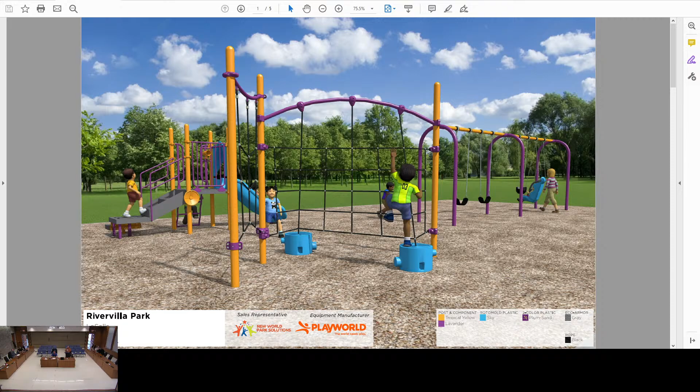We got the Rivervilla Park, which is a smaller neighborhood park. It was a smaller budget. So with smaller budgets like this, the one thing you want to do is go after the main thing which children play on the most, which is obviously swings. So we have a 2-bay swing set there. In the swing set, you'll have 2 belt seats, a toddler seat, and then an accessible swing seat, so everybody can play on the swings. That's the most important part of a playground for children. They seem to really go to that, and that was part of the tender as well.

They wanted 2 bays. On top of that, they specified they wanted a small structure for the little ones with a slide, and then climbing apparatus with ropes. Because of the budget, we couldn't go large, but we went with some of our most popular items. On the small playground, there is a transfer station that gets you up to the 2nd deck. On the deck, we put a telescope. It's not a real telescope, but you can still see through it and look around, and it's an accessible one, so it's been lowered a little bit. There's a slide and a climber, and then at ground level, there's an accessible steering wheel.

Then when you go to the senior area, we have 2 different types of rope climbers, and what we did with those is put seats at the bases, so children can sit there. If they can't climb, at least they can be around the area and be with other ones. The ropes, I brought all the way down to the bottom, so some children that can't reach up or get high can still play with the bottom ropes, and children that have a little bit more flexibility and strength can climb up to the higher levels.

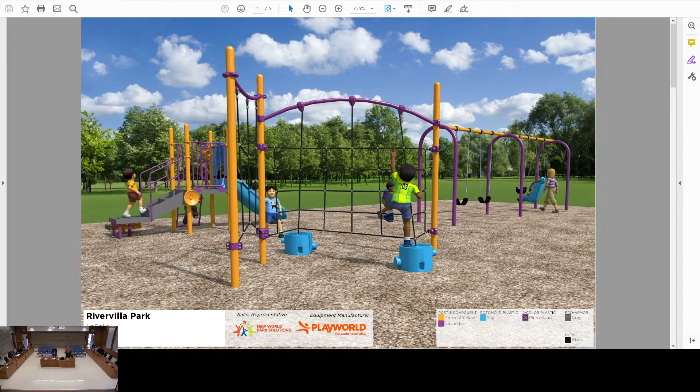I just wanted to add one thing I should have said at the beginning. All the playgrounds we're installing this year have an engineered wood fiber base, so none are being built with the rubber play base. From an accessibility perspective, a lot of times we have questions about whether engineered wood fiber is accessible, and it is. That's really important to remember. A big reason we've gone with that on all these parks is the cost.

The cost of the rubber base is significantly more. And we've found with maintenance and replacement over the years that our rubber play bases, while really nice especially at the beginning, do often require repairs. The lifespan on them is limited, and it sometimes doesn't match up with when the playground is going to be replaced. So especially on our smaller parks and playgrounds, the engineered wood fiber is the preferred method for our operations.

Thank you. I will open it up for questions or comments from our committee. Mr. Burns?

I guess to administration, it's nice to have the playground equipment, but are we going to have any park benches? Because there's more than one child, could be young, and what does the mother do to sit and read a book or something? I don't know if that's in our budget or what's planned besides that.

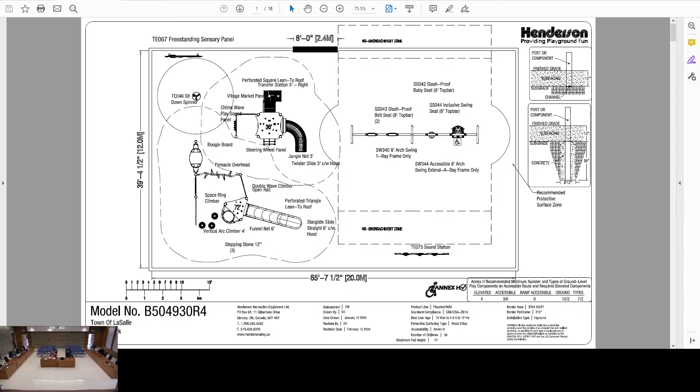So with that, they would take a project and say you have so many elevated components, therefore you need so many on what's considered an accessible route. Someone with limited mobility, not necessarily a wheelchair, can they get to certain things? There's a formula for how many ground level play items and how many types of ground level play, so you don't just have a wall of steering wheel panels or things like that. So with this project, we have...

We have the senior structure, the swing set, spinner, and a couple of panel sections. In this one, the junior structure has a transfer station, which allows a child in a mobility device, assuming they can get out of that device, the opportunity to basically move out of their chair onto the step, and then maneuver without raising their feet any greater than a 6-inch rise.

So with that, it has a transfer station going to a 3-foot deck with an elbow slide, a jungle net climber, steering wheel panel, and then at ground level play, we have a village market panel, which is a play piece, social play piece, and a musical chime wave.

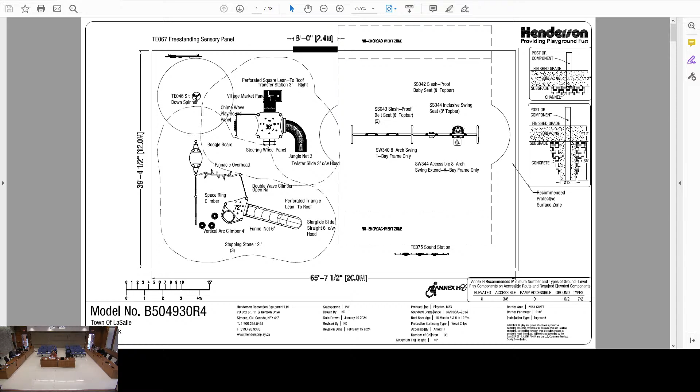If you can switch over to the next one, please. Thank you. So those are the two traditional type structures, the ones that look like what you're used to seeing in a typical play space. So we do have a variety of climbers, a variety of ground level play, and slides with good access there. The next one, please.

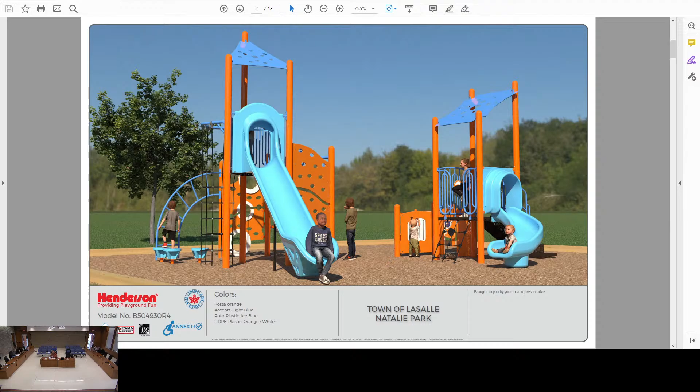Just another angle. If you look in the lower left corner, that's a sensory play panel. It's a very large panel with a variety of play pieces for someone who is young to access, with a bunch of different devices on it, gears, little finger maze items they can use for other sensories. And next to that is a spinner.

If you can go back to the other slide, please. There, next to it looks like a little keyhole. That is actually a spinning device, so a child can sit on it or stand on it, and it rotates. It's purposely on a bit of an angle so that your body weight allows it to spin versus being straight up, where it's pretty difficult to get that momentum.

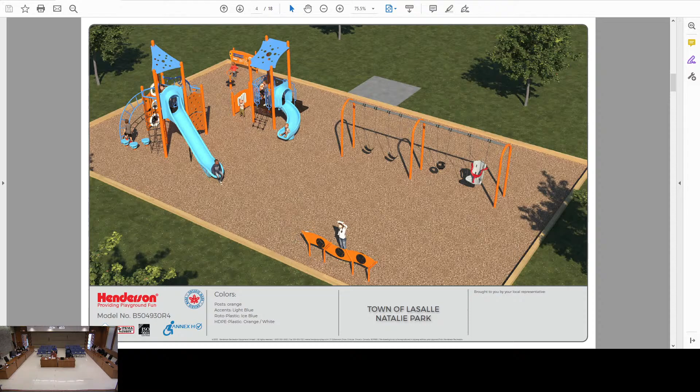Okay, next one, please. Here too, you have the swing set with the 2 belts, a baby chair, and an inclusive chair for those that require it. That is positioned at the end there. If you notice in that render, there's a bit of a cement piece up at the top. That would be the access cut out of the wood border, allowing wheelchairs or mobility devices into the play space and onto the engineered wood fiber mulch surfacing.

And the other item at the bottom of the page, you can see the rendering of a young girl there. It's orange with the 3 black circles. The face on that is actually a series of musical devices that operate by use of an electronic dynamo. So what you do is you spin the dynamo, and it gives it energy so that when the child touches it, it will create a musical sound.

You'll also notice that it's a bit elevated. The idea for that is so that if I'm in a wheelchair, it's possible that I can get my knees under it, so I'm that much closer to it versus getting access to it by being sideways and trying to use it. I can actually use it properly.

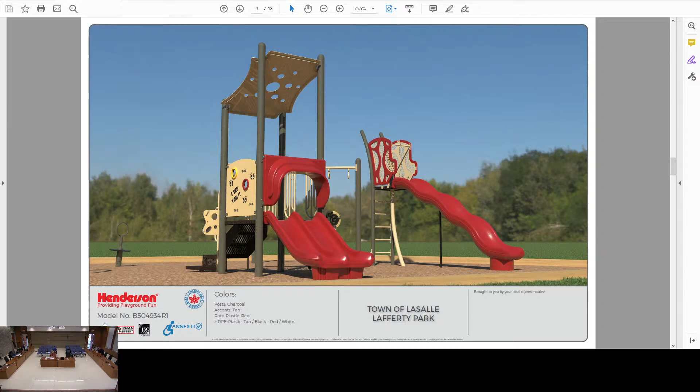Just a different angle. The senior area has a 6-foot slide, ladder access, and a trapeze arc for upper body.

I believe that's the last of the Lafferty angles. If you want to go to the next one, please.

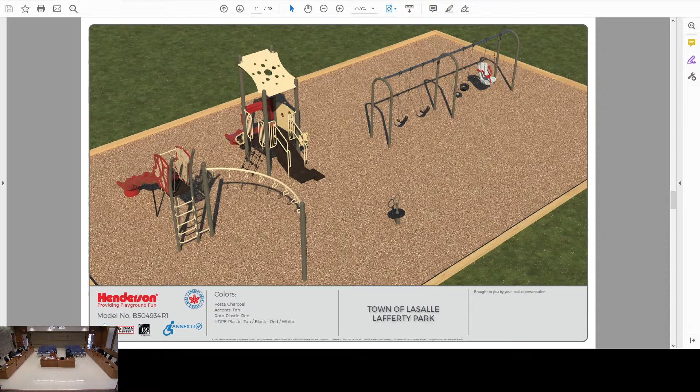So there we go, everything within there. There's a secondary access up to the 3-foot slide with that jungle net climber, so there's a primary and a secondary access for the younger children.

And next slide — so that was for Lafferty. Was there any questions on that one? Any comments or questions from the committee?

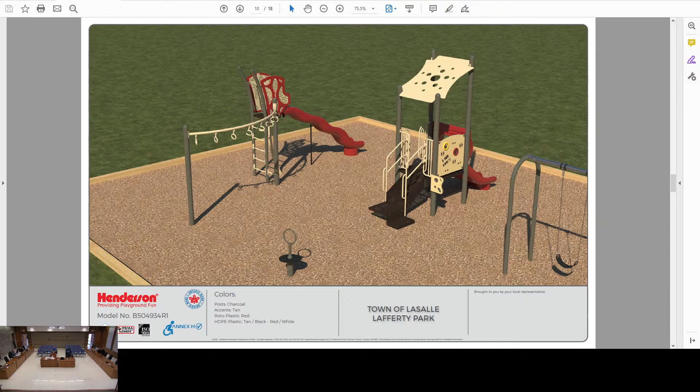I don't see an access for a wheelchair pad like you had in the last one. Can you go back, please? Or is it on this slide? On the colored pictures, I don't see it. Maybe I missed it — go back one more, and one more.

It didn't come out in the renderings just because of the angle, but it is there — that blacked out area near the scale. That's the area notched out of the wood border, and when the installers are there, they'll work with Mr. Bryden's crew to fine tune the exact placement to your pathway.

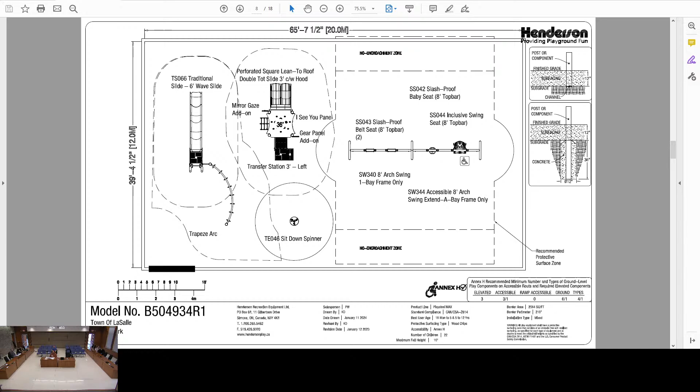Any other comments or questions? Okay, Mr. Wendell, you can go on to the next. If you can forward to the next black and white. There we go, back one. There we go. So this one here is Meo Park.

And here too, same as what I said previously regarding the CSA and Annex H for accessibility - trying to get you as much play value within the space as possible that is going to actually be used, like things that are proven winners.

Here you can see that blacked out area on the site plan just off from the swing - that's the access. That proved to be the most logical place to put the access based on the placement of the path within the park and logical access into the play space.

If you notice those dotted lines around the equipment, that's the surfacing zone - the play zone required under the Canadian Standards Association. I don't like putting access points where you're walked right into that. It's just good practice not to have a child walking into the no encroachment zone if we don't need to, for the swing - because a child using a swing has no way of stopping if somebody walks in front of their path. Getting the access out of that area makes a lot of sense.

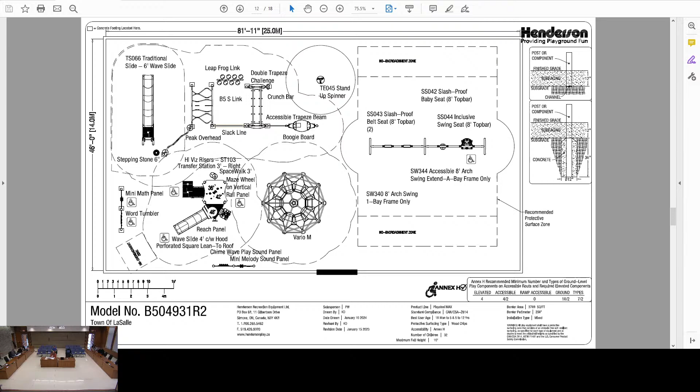If you want to go to the next slide, please. So here's one of the angles of the project - this is the junior structure with the 4-foot high slide and the transfer station going up. You can see the climber off to one side. The panel next to the slide is a reach panel, so a child whether seated in a wheelchair or standing and more ambulatory can be jumping - a bit of a contest to see how far you can reach or jump up to.

The little thing that looks like a yurt next to that is a net climber. The cable inside of that is braided metal wrapped with a polyamide yarn, which has been proven for almost 50 years now as being the best product for use in this environment.

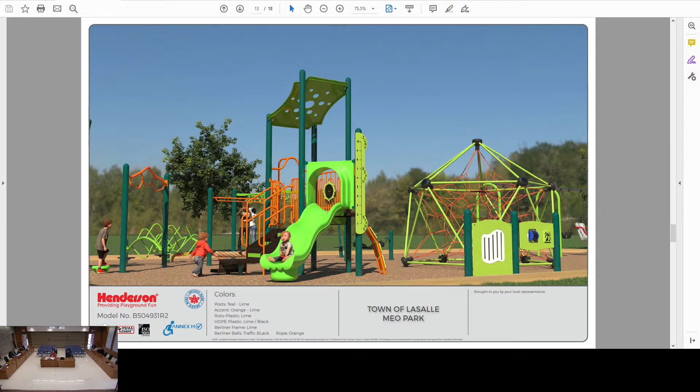Next slide. That's primarily the senior structure angle, where you have the slide, the upper body pieces below, and items at ground level for play that children can use for balance, crawling, and upper body.

You can't really see it there, but next slide please. Just trying to find an angle that shows it - on the senior play, we have the upper body double trapeze, but there's also an accessible trapeze beam, so that if I'm in a wheelchair I can get under it, and assuming I have my upper body abilities, I can be using it for upper body exercising.

This has a very wide variety of different play experiences. That black belt material sways back and forth, so a child could stand on it, sit on it, or lay on it and sway like a hammock. It's the same spinner as the other parks, except it's a little bit taller - it's the stand-up spinner instead of the sit-down spinner.